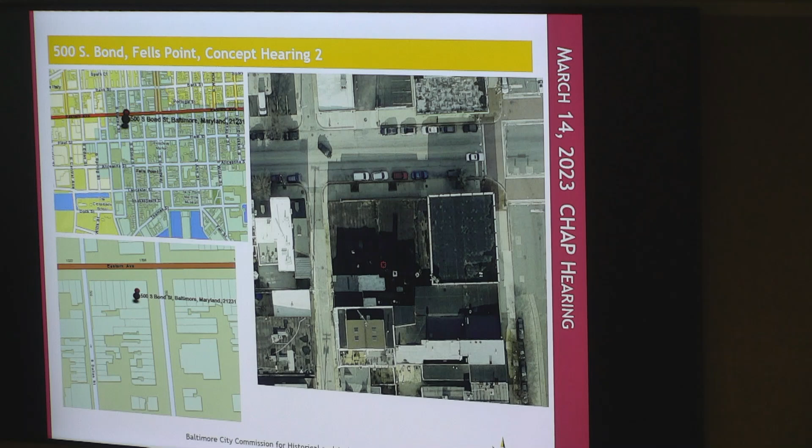Thank you, Mr. Chairman, Commissioners, ladies and gentlemen. We have for you today the continuation of the review to construct a one-story addition at 500 South Bond Street in Fells Point. Justin Seto, architect, applicant Chasen Development. The site, as noted before, is located in the western edge of the Fells Point Historic District. This area has been previously reviewed for the adjacent property at 1517 Eastern Avenue.

The structure is this one with the Chasen Company's name on the side of the building. It is a contemporary warehouse building located at the intersection of Eastern and South Bond Street, and also includes two row houses on the south side that had lost their original historic facades at some point before the creation of the historic district in 2007.

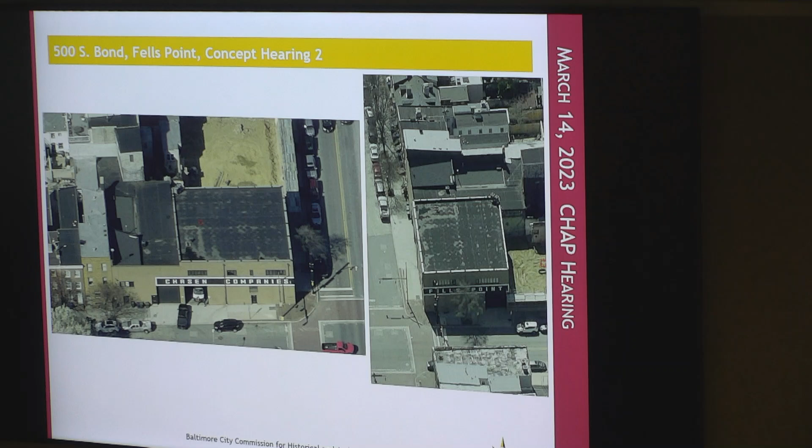The plans are to construct a one-story addition on top of this existing building, and convert the interior top floor area of the warehouse into residential units. The site map here shows the exact footprint of the property, and we see a view looking north towards Eastern Avenue at the top.

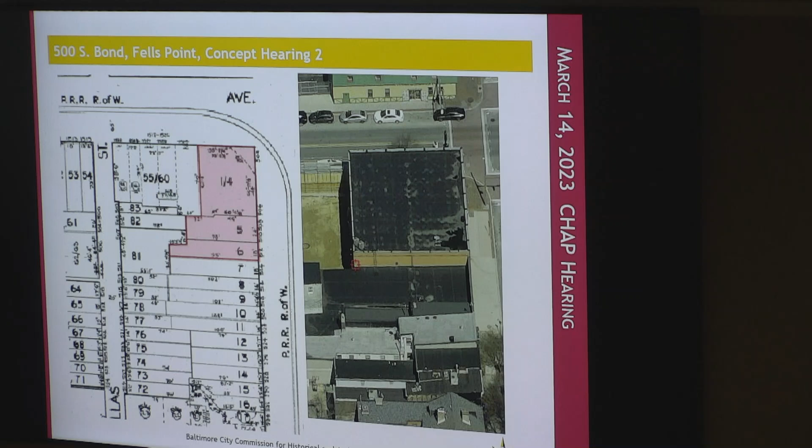The property was reviewed for signage by CHAP staff, and has been approved for height, massing, and scale of the proposed addition on November 13th, 2022, and is returning for review of final details. The applicant proposes to construct a one-story residential addition on a two-story non-contributing warehouse building.

The proposed addition will be comprised of a band of multi-light aluminum-clad windows on both the north and east elevations. The new floor will not be set back on both the Eastern Avenue and South Bond Street elevations. The building will have a flat roof. There will be an elevator and stair towers that rise an additional story, but they're located at the southern portion of the building and set back from the South Bond Street elevation, so these will not be visible.

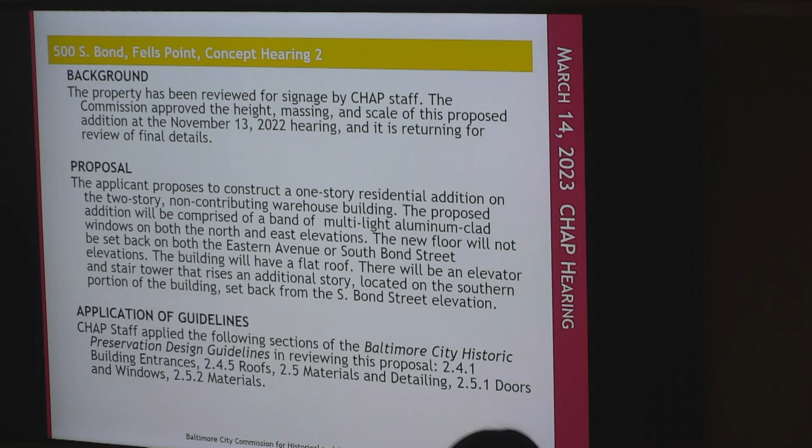CHAP applied the following guidelines: 2.4.1 building entrances, 2.4.5 roofs, 2.5 materials and detailing, 2.5.1 doors and windows, 2.5.2 materials.

Under 2.4.1, building entrances, the new residential entrance will be located close to the adjacent residential properties along South Bond Street. Under 2.4.5, roofs, the building will have a simple flat roof, covered in a rubber membrane system. All the rooftop features will be set back and not visible from the public right-of-way. The addition will have a simple, well-proportioned cornice edge with minimal detailing.

The current design is showing a broken-up cornice design at the moment. There will be a small rear deck on the southwest corner of the roof.

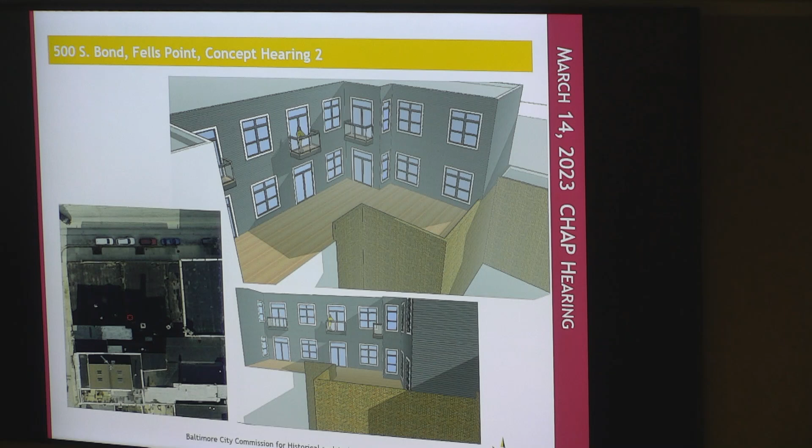Staff recommendation is for approval of the addition with final details to return to staff. Thank you.

Eddie, thank you. Commissioners, do you have any questions for Eddie? Yes, just questions, right, not deliberation. Yeah, that's right. I have questions, but maybe, I don't know if you're going to steer them to the architect.

One question: the use of the first floor warehouse is going to stay, that's not changing, is that correct? Correct. And the other question I had... what was the other question I had?

On the rendering, it looked like it showed a site improvement in the right of way, and I'm curious about that. If you look at the photo right now, in the corner, the ADA accessible ramp kind of runs into the corner of the building, but it shows there's improvements on the site corner. Is there any intention to do site improvements in the right of way on that corner?

That you'll have to ask the development team. I do believe they plan to try to improve it, but we haven't talked specifically about that in this phase. Those are all my questions for now, and I'll wait for deliberation. Any other commissioners? Any questions for Eddie?

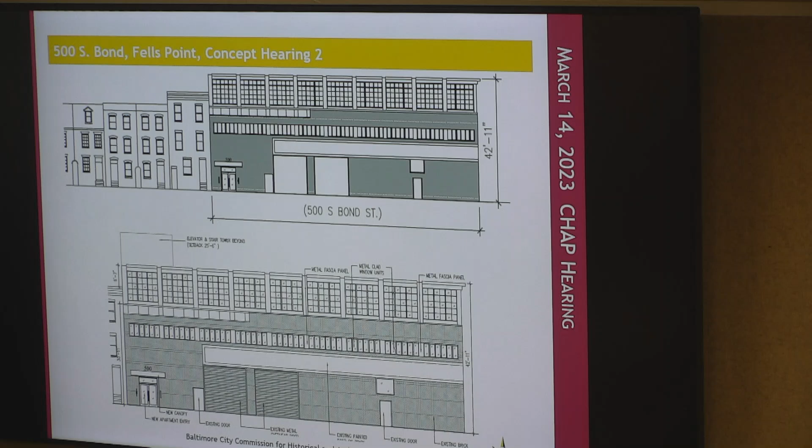I would also consider—it looks like you're continuing to cut the rest of that off in order to continue that, or vice versa. It could be that you're filling that in. I would think that if you go back to the rendering, maybe on the eastern side, with—there you go.

If you look at how that cuts down and jogs at the cornice of the new construction, I don't think it's something that would make or break it, but if you're showing this in conjunction, why not have the cornice match up across and really turn the corner? There's a way to adjust the detail so your glass fenestration goes up higher, but the cornice line would still match the cornering of the building. So it's just a small recommendation.

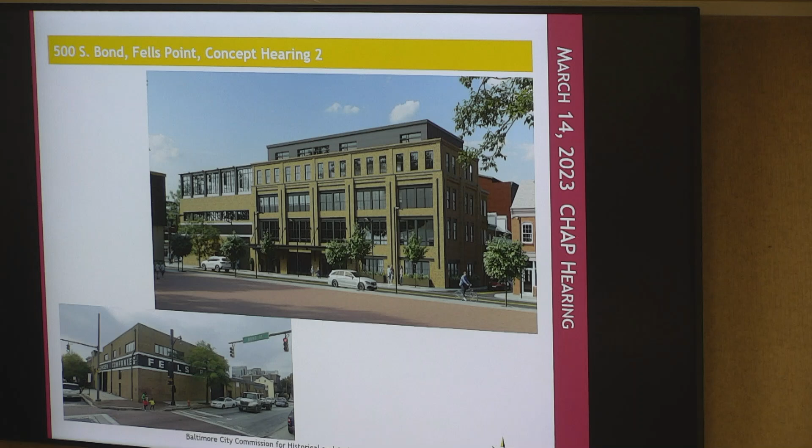The other thing I want to be mindful of: it looks like the second floor of your units is part of a strip window system across the second floor. Is that right? I'm only concerned about the scale. I'm assuming you'll deal with this in your permit drawings, but it doesn't look like it's per code for egress for an emergency window, so just be mindful of that. Looking at the elevation, if that second floor is part of the strip window system for the new units, those windows seem very narrow across the board. If they're operable, which one is operable? Again, it's neither here nor there for us, I just noticed it and didn't know if that was an issue for egress.

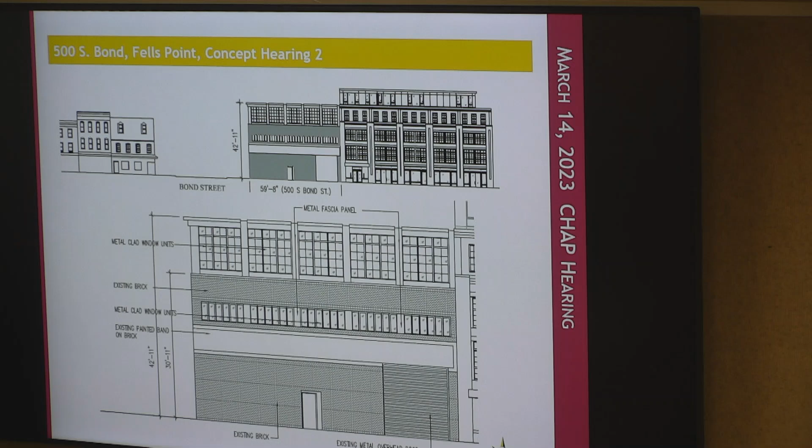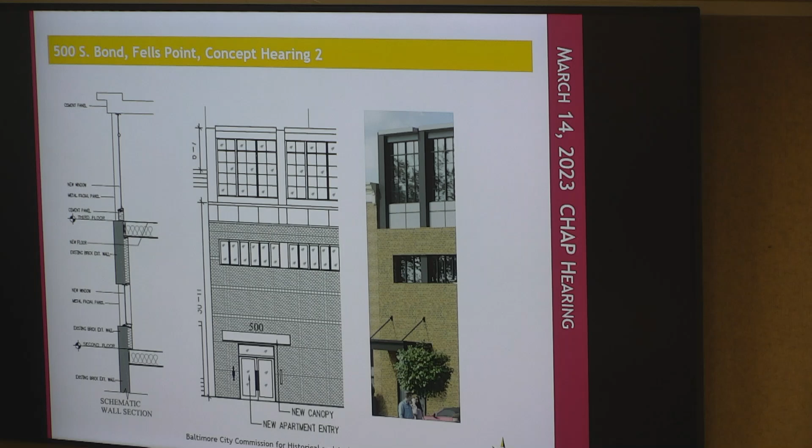The last comment I have, maybe it addresses the neighboring properties' concern a little bit. The only thing I'm missing with this project is the corner of the building - looking at the rendering, I know the warehouse use isn't changing and you're not incorporating commercial retail, but that corner seems like a missed opportunity. We have a corner that's really solid, and you'd wish maybe the lobby should have been there, where that corner can be engaged - opened up with more fenestration, more activity. The main lobby could be there instead of being right next to the neighboring residential property.

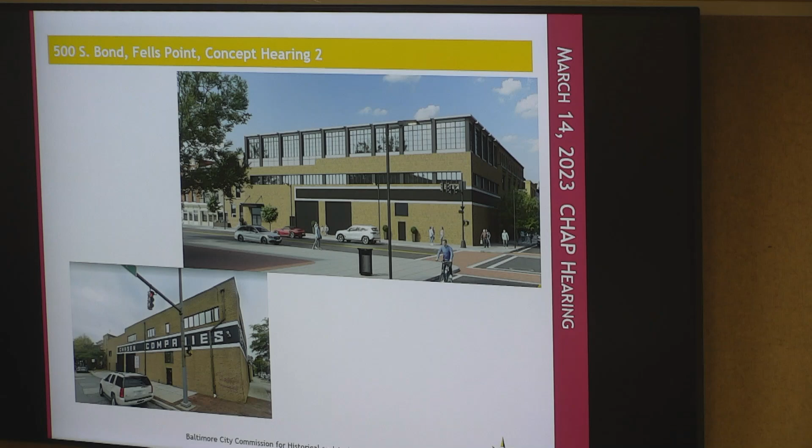But the ship has probably sailed. My recommendation is that the owner and architect would consider that corner more, since you're going that far anyway to enliven it. That goes with the site improvements too - you're going to have a new ADA ramp corresponding to the crosswalk, and probably new sidewalk all the way around. But we still have that solid corner, and I wish that would be addressed. These are more urban design motions, probably, as opposed to architectural or historical design motion, but I just wish that solid wall in the corner was addressed. So that's my comments.

Okay, Bob, thank you. Is there anyone else?

Go right ahead, Ann. Well, that's what I don't understand - the ground floor plan doesn't correlate to the renderings at all. Is there a plan I'm not getting? Like page 12 of the PDF? Everything we were given is in that packet on the Wix site. So to your point, the corner in this plan - the lobby? No, it's on the turn. Eastern is the top of this, and Bond is the right. Oh, because there's no north arrow here. Yeah, that's why - go north. Thank you, so glad I can read a plan.

Anyone else would like to share?

Go ahead, Catherine. I too agree that the updated rendering in response to the ARC comments has improvements over what is shown. I have a couple comments, but as a procedural question, since these weren't submitted previously - do review comments we propose need to reflect the rendering shown on screen in that application, or can we base them on the updated rendering provided by the applicant?

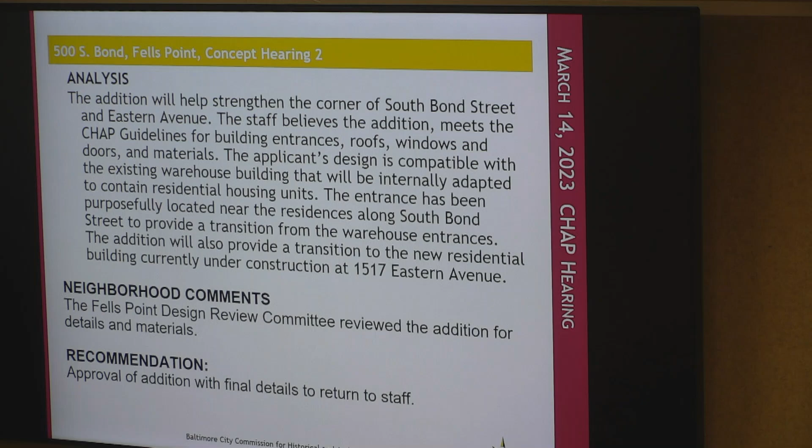Commissioners, the recommendation is approval of addition with final details to return to staff for 500 South Bond, Fells Point. Do I have a motion for the recommendation? I was going to say, to make sure Eric is good with writing down the motion, I guess my question for fellow commissioners is this.

If we agree with staff recommendation, are we agreeing based on the updated rendering or the prior one submitted? I think it's the updated, right? That's the latest. That's what I'm asking. Yeah, why don't we just approve the FDRC. Yes, you guys are quiet, yes, okay, all right.

If everyone's comfortable, then I'll go ahead and make a motion. Okay, so I move to concur with staff's recommendation for the approval of addition with final details to return to staff, based on the updated rendering provided at the meeting today.

Do I have a second? Second. All in favor? Aye. Do I have opposed? The ayes have it. Thank you.

Next on our list, we have 517 South Wolfe Street, Fells Point Historic District. The request is concept review to construct a two-story addition on top of the existing garage on South Chapel Street. The applicant is Julie Tice, and the staff, once again, is Mr. Eddie Leon.

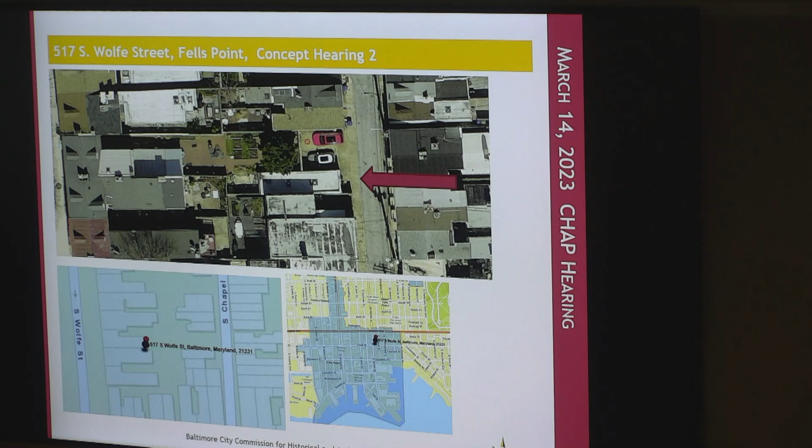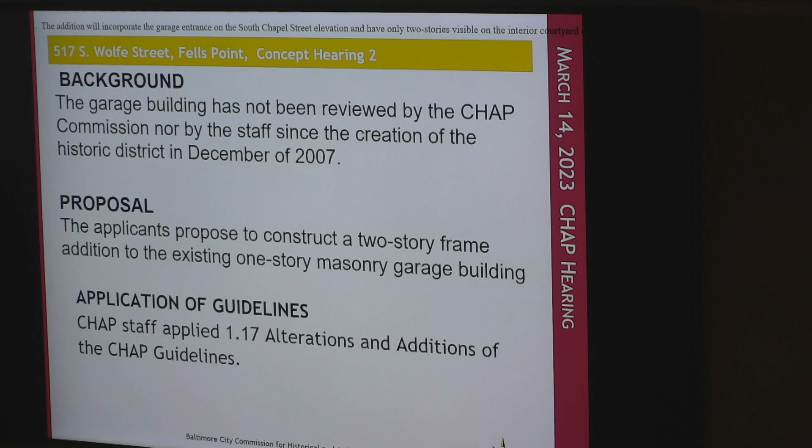The garage building has not been reviewed by the CHAP Commission, nor by the staff since the creation of the Historic District in December of 2007. The applicants propose to construct a two-story frame building addition on the existing one-story masonry garage building. Staff applied 1.17 alterations and additions of the CHAP guidelines.

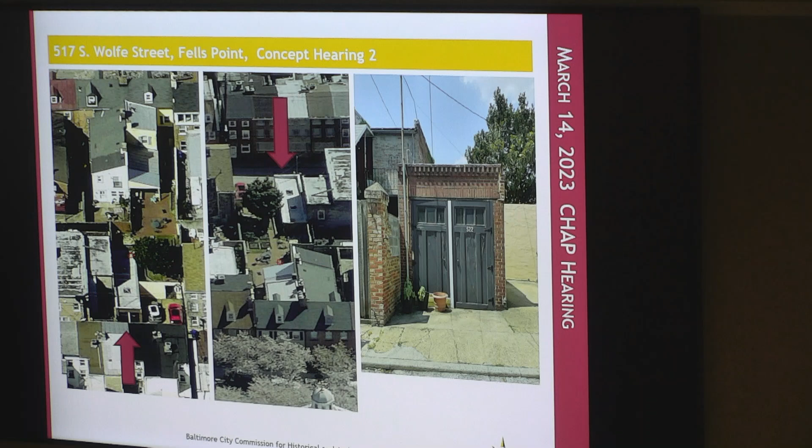The site on the far left photograph is looking west toward Chapel Street at the bottom and looking toward the back of 517 South Wolfe Street. The middle photograph shows it looking from Wolfe Street toward the east, and we see the top of the roof below the arrow. Then we have the actual two-door standing garage building that remains on the site facing South Chapel.

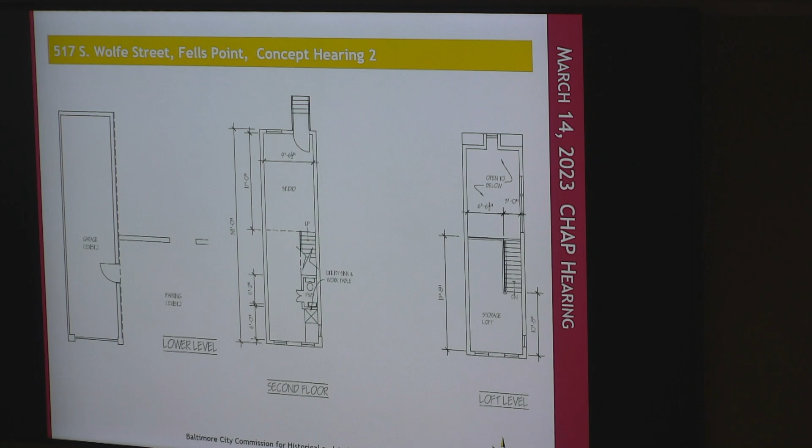The plans are to retain the garage structure on the ground floor and then build two additional floors above it. The proposal is almost like a dual design. The South Chapel Street elevation will add a facade of 2 stories directly influenced by the late Italianate style of row house architecture typically found throughout Fells Point. It does conform to the height, scale, and massing of other structures along South Chapel Street.

The reverse of the building, due to the topography of the site, only the 2 stories on the other side would be visible, facing into the courtyard. So we have a gabled roof with a dormer, single entrance and window, and small stairs that allow the owner to enter the building at what would be the 2nd story level of the building.

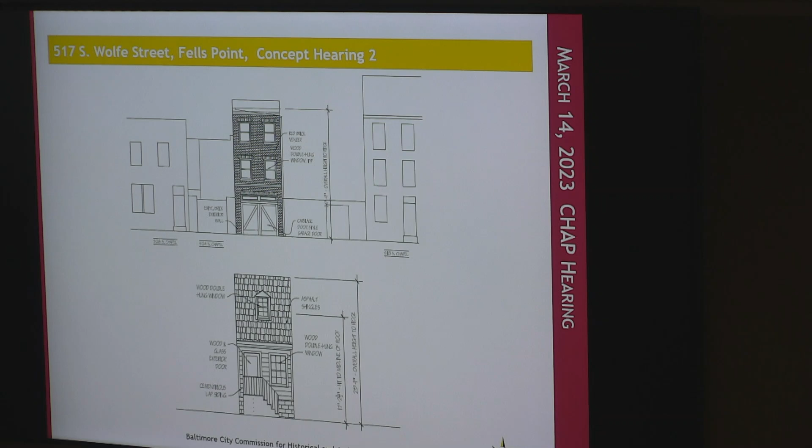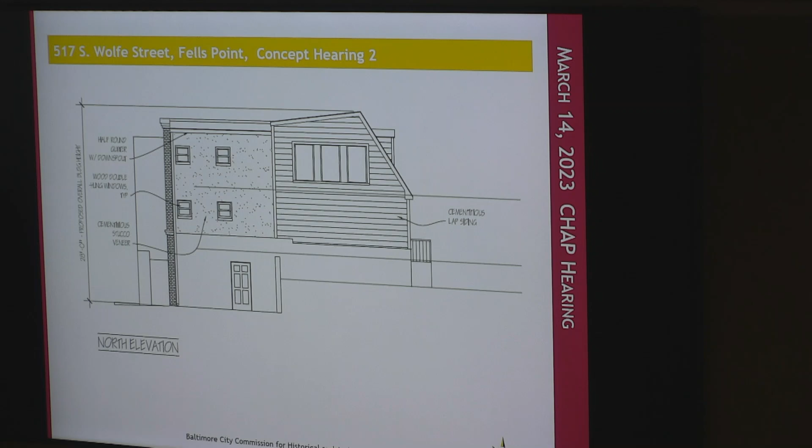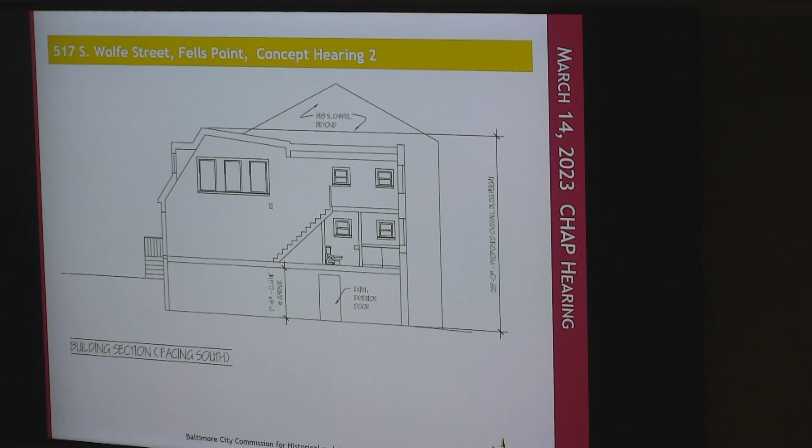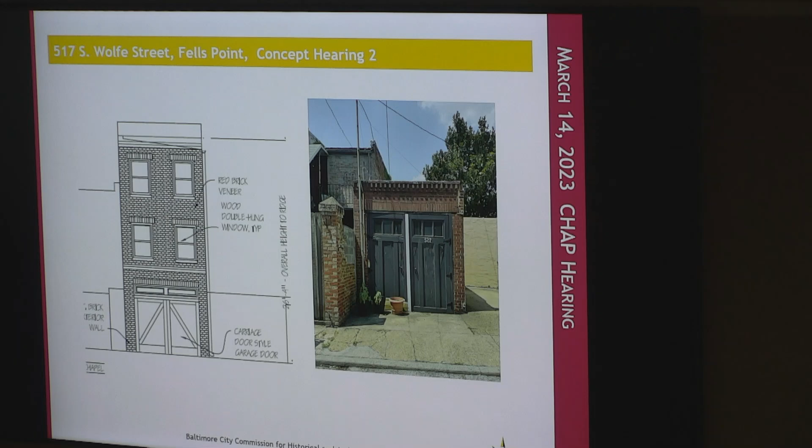Looking from the south side, we see again, looking through the building, a cut-through. We also see the windows on the other side that face over the parking area pad that exists. A close-up detail showing double hung windows on the second and third story, a very simple designed cornice, retaining the two garage doors and replacing them with proper carriage doors incorporated back into the design here.

Staff believes the addition meets the CHAP guidelines for height, scale, and massing. The combination of styles is unique and will not be confused for an original historic building, but reflects that it is a product of its time.

The building will be used as an artist studio for the owner. The building incorporates two different period styles found in the district. This blend of different styles can be found in many examples throughout the district that has evolved over 200 years, and therefore does not seem out of place.

The Community Association has had no objections, and the DRC did review the project previously when it had a slightly different design for the same concept of building 2 stories above it. Recommendation: staff recommends approval of height, massing, and scale, and recommends that the project return to staff for final review.

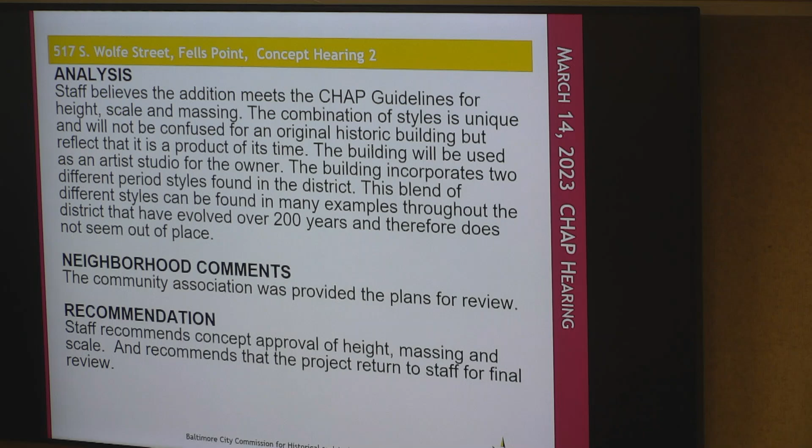For 517 South Wolfe Street in Fells Point, do I have anyone who'd like to put that motion forward? I move to approve height, massing, and scale, with the addition that the original door arrangement be researched and considered for the design of new doors, and that the project return to staff for final review.

Do I have a second? A second. All in favor? Any opposed? The ayes have it. Thank you.

Next on our agenda, 1100 East Baltimore Street, Jonestown Historic District. The request: demolition hearing, determination of architectural significance. The applicant is the Helping Up Mission, Inc., which is the contract purchaser, and our staff will be our own Eric Holcomb.

All right, unless Stacy and I are having a conversation of who should give the staff report. Whatever you two decide. Eric. All right, it'll be good to see you up there in front of the podium. Yeah, all right, Eric. And this is the... Great.

Good afternoon, Commission, nice seeing you from up here. We're here today to do a determination of historical significance of 1100 East Baltimore Street. Again, the petitioner is the Helping Up Mission, that's the contract purchaser.

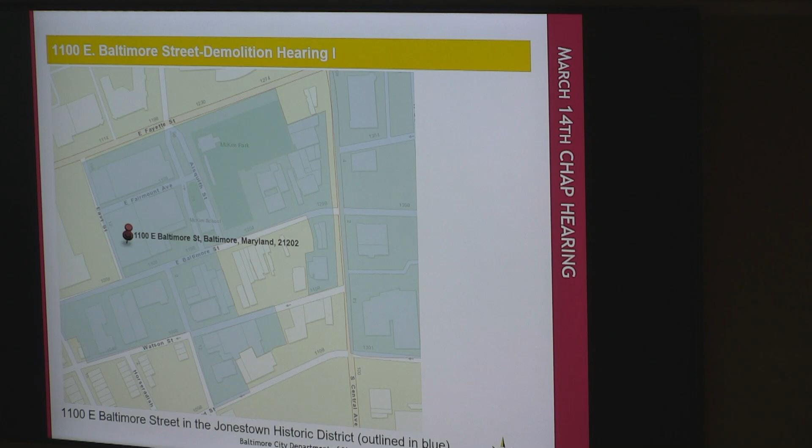So taking a quick look here, the blue is the local historic district of Jonestown, and then you see 1100 East Baltimore Street pinned right there. Directly west of it is a two-story garage. Directly on the south side is more of your historic Jonestown fabric.

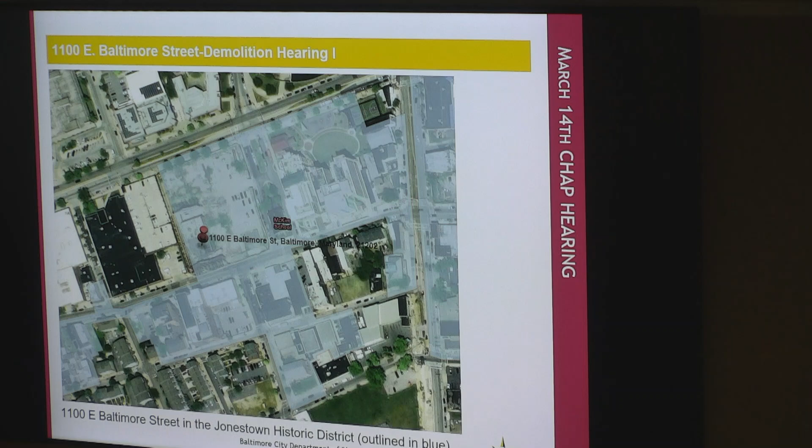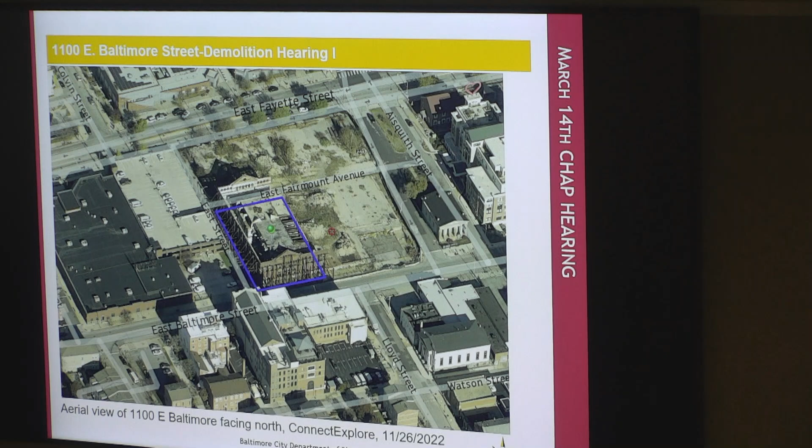All right, so first let's look at this. This was the entire block of the original development proposal that was given to CHAP back in 2012. Through several different CHAP hearings, we approved the demolition of everything except for three elevations: the south, west, and north elevation of the historic Hendler building, the Creamery building.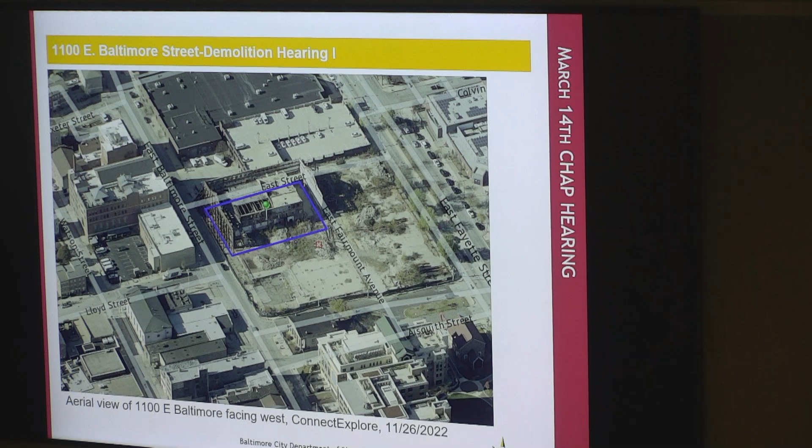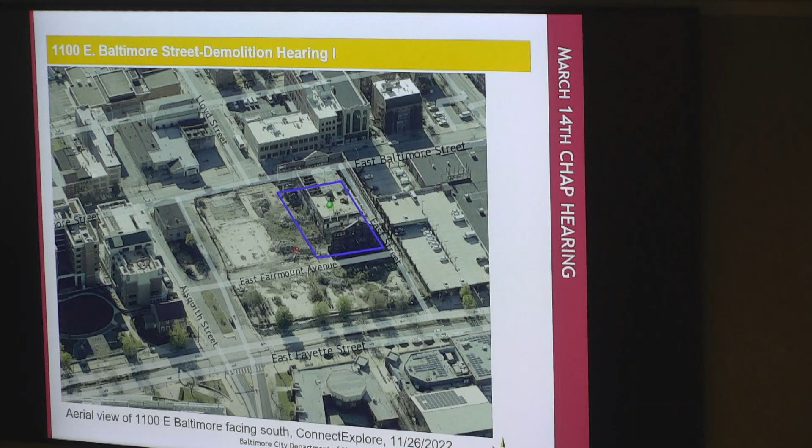This is what we're seeing right here, these three elevations. This still has its interior on there, and that's why you don't see the shoring on the outside. Through the approval process and the development efforts of this block, we approved a lot of non-historic demolition and some historic demolition.

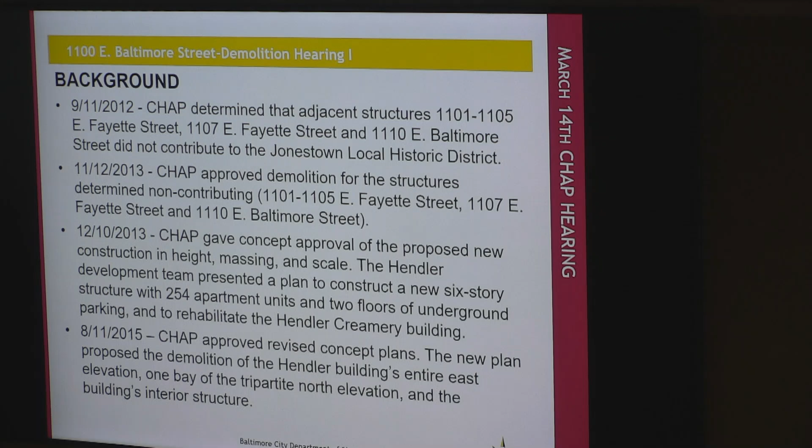It was a block-size development. In 2015, we approved revised concepts; a new plan proposed the demolition of the Hendler Building's entire east elevation, one bay of the north elevation, and the entire interior. So that's how we got to what we have now.

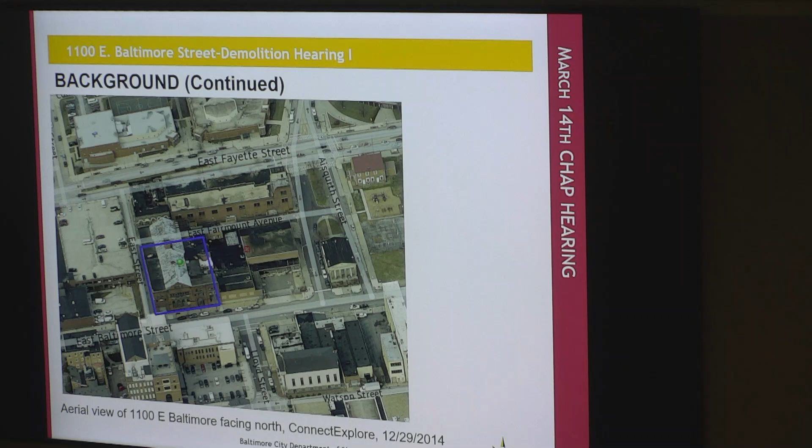Looking at the background again, that's what we sort of see before demolition. In 2017, we did some more amendments, and in 2018 DHCD approved the demolition permit and a shoring plan for the facades. On November 20th, 2021, a building inspector went out to investigate whether it was an emergency condition, and determined it was not an emergency at that time.

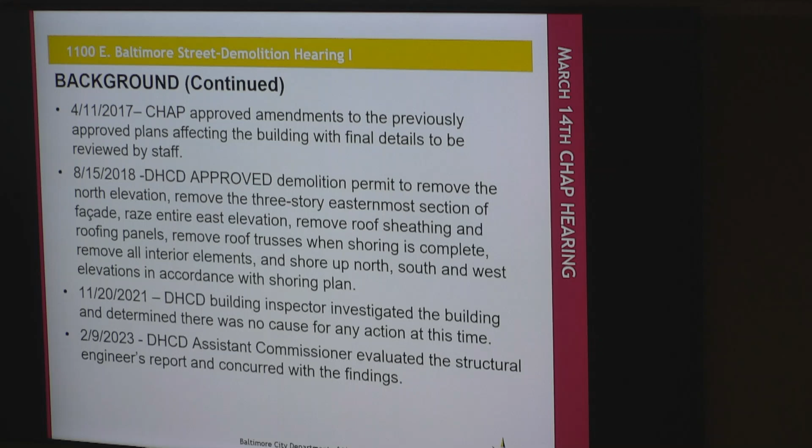But on February 9th, 2023, the Assistant Commissioner evaluated the structural engineer's report and concurred with its findings, so we had a double-check on that. Just looking at the background again, here we go. This is what we approved.

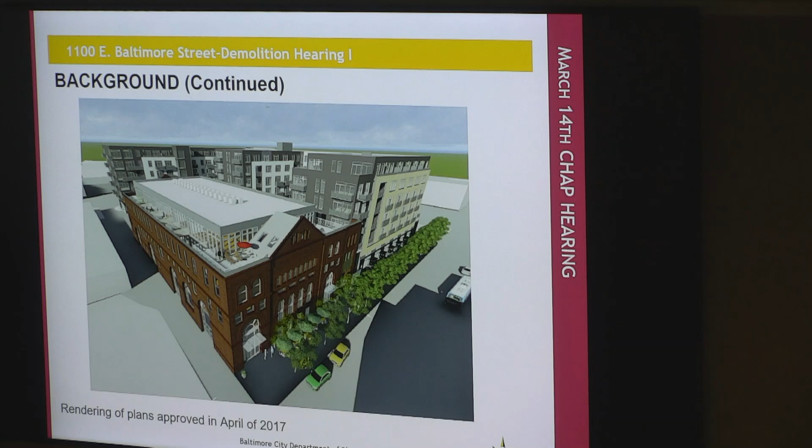This was one of the final renderings of what it was supposed to look like. But that did not happen. It was a great effort to develop the property, but it didn't happen, so now we're left with the proposal to demolish the remaining 3 elevations.

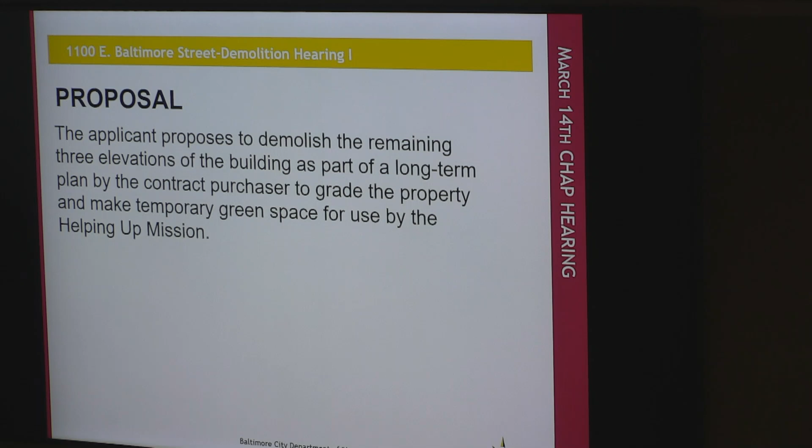As part of a long-term plan, they'll grade the property and make it temporary green space, and then in probably 5 or more years develop that site for their purposes. So basically, we would have a green space for about 5 years.

Application of design guidelines, looking at this demolition hearing. These are the guidelines that we use to consider what is historic and what is not historic.

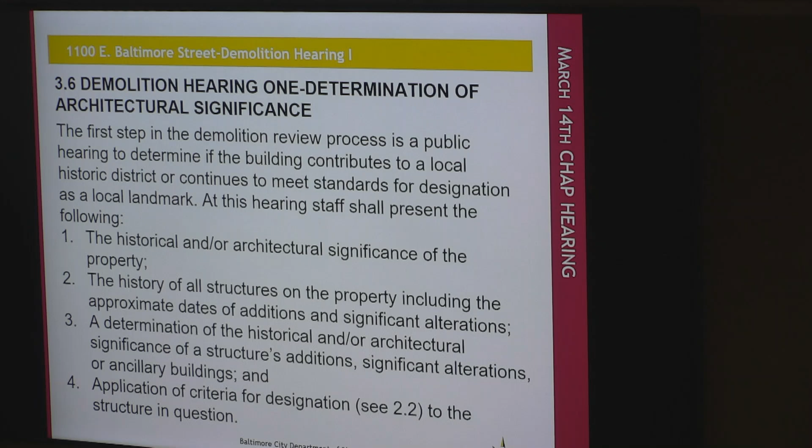Historic architectural significance of the property: all structures, dates, the determination of the historic and architectural significance of a structure's additions, significant alterations, or ancillary buildings. So when we do a determination of architectural significance, we look at these right here. What we're looking at basically is the 3 elevations of this property. That's the only thing that's left of this.

Determination regarding the historic significance of the structure would be prior to considering the details of the demolition. We really don't have any details. We will not be looking at new construction drawings anytime soon.

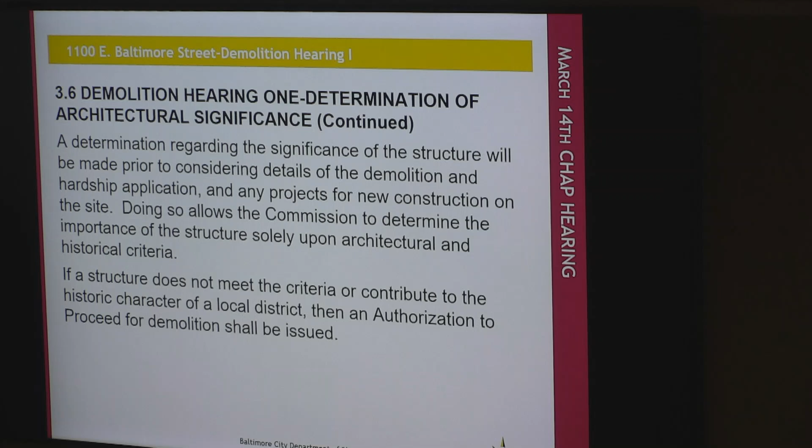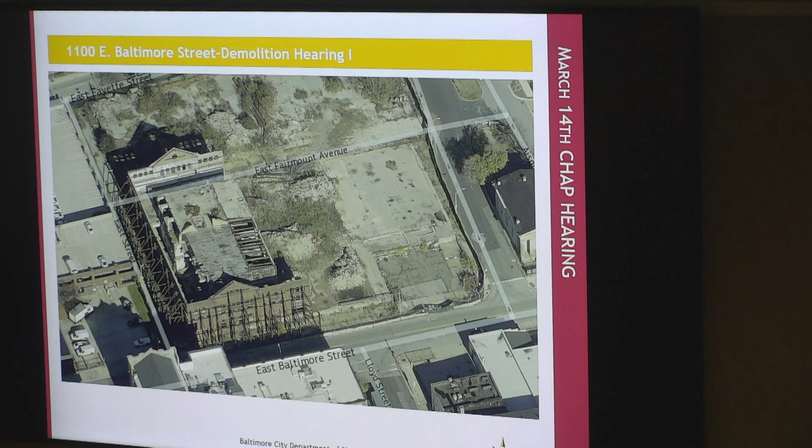And then looking at what we have today is pretty much just the 3 buildings. Now, want to make sure that we look at the criteria for evaluation. And this is what we will apply to see if it still retains its historic significance or not. And we'll walk you through that logic to get there.

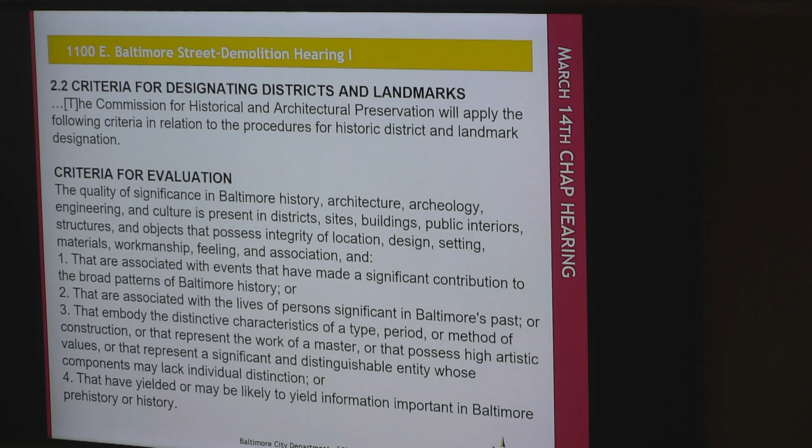But before we do that, we want to do an analysis. And that analysis is going to look at the structural engineer's report and see how much of the building that we see today will remain if this building would be restored and rehabilitated, or the facades being stabilized and incorporated into a new development. So that's what we really want to know, is how much of those 3 elevations can we save?

And looking at some of the things, the structural engineer's report really pointed out lots of different things, and then we'll have a list of the deterioration on here, and then the conclusions that we looked at. But if you're looking at these things, we'll just go back here.

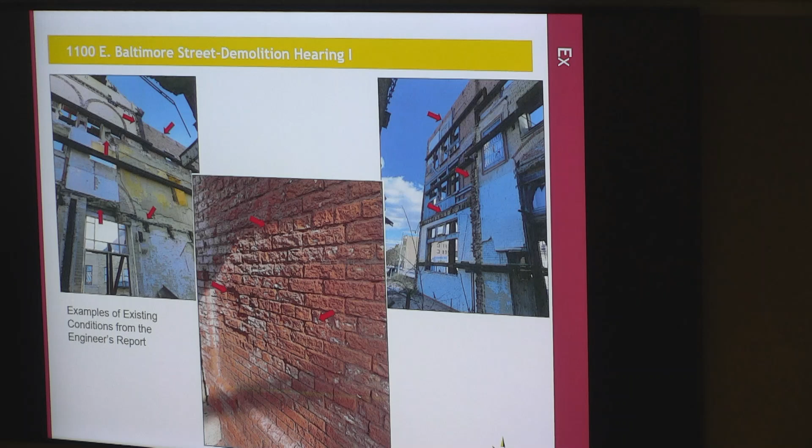Lots of sandblasted brick that has spent years and years deteriorating and is sort of chalking and falling apart. We have on the inside, there are steel lintels and steel I-beams that were left in the building during the 2018 demolition. Those steels are causing problems to the building right now. And if these facades were to be incorporated into another development, they would have to be removed. That's something we'll talk about a little bit later.

And some other problems, we see spalling of the brick. Even seeing some of the wythes of the brick sort of separating from the areas. There's no cap on the top of the building right here. So this is really sort of lists what we saw there.

The interior surface of the wall, well this is the analysis piece of it. From the conclusions of the engineer's report, we know that the interior surface of the wall would have to be completely removed and replaced if the walls were to remain. Now, is that 90% or 100% or 85%? We could discuss that, but the vast majority of the interior surface would have to be removed and replaced.

The deteriorated exterior side of the facades can't be repaired independently of the interior side. So if you're working on the exterior, replacing portions of the exterior wall and portions of the interior wall, you're going to have a direct impact on either the interior or exterior, and most likely both sides of that wall will have to be removed.

That wall, I think when you get to the bottom, when we asked the engineers, is probably 7 bricks thick, and when you get to the top, it's about 2 bricks thick. So there is that difference right there. But that's something to really think about. There's a direct relationship between the interior and exterior. It is impossible to replace the interior wythes of the walls while leaving the exterior intact.

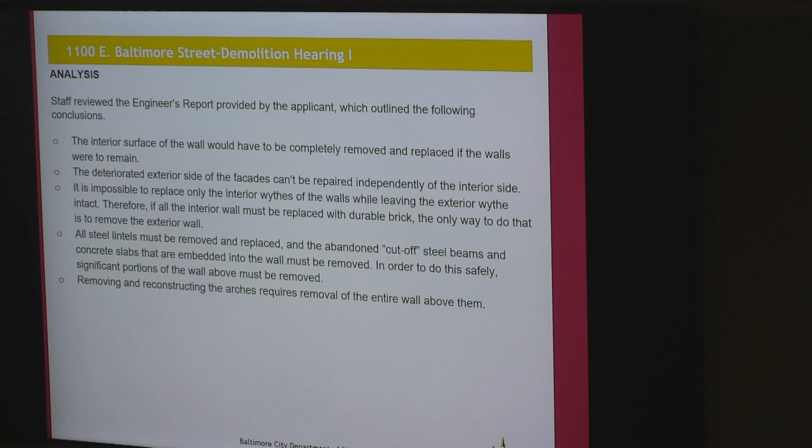So basically, if you're really thinking about it, not only do we have to remove the structurally unsound and extremely deteriorated brick and replace it with new brick, but when we remove portions of the building we have to make it structurally sound. There are portions above it we have to remove, because you can't do it safely. Gravity will pretty much say the bricks above will fall if you remove the bricks at the bottom. There's ways to do it, but that's sort of a given.

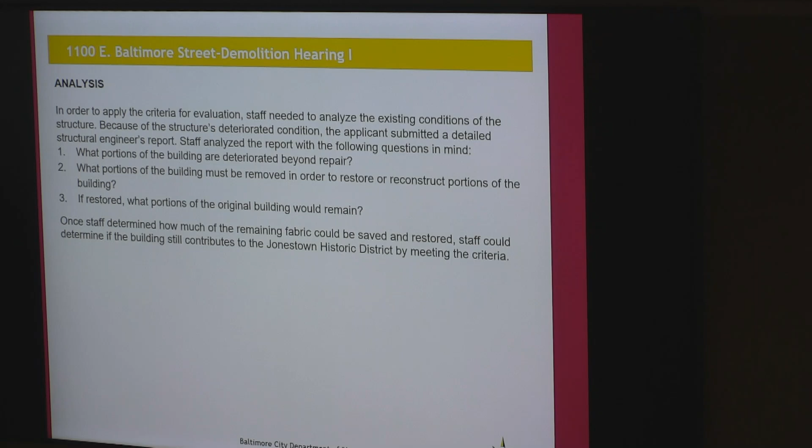And just looking at some more here. And am I going the right way? I'm going the wrong way. Sorry. It's a lot harder than I remember it to be.

So at the end of the day, and we could have a discussion on this, we do believe that the existing structure is deteriorated beyond repair, and therefore it has lost its historical significance. It cannot convey the four criteria that we use to determine historical significance, and no longer meets the criteria for eligibility as a contributing structure for the Jonestown district.

And I think that's it. But I think one of the things that would be really useful, first of all, if there are any questions, hopefully the structural engineer can come by and talk to and answer your questions about his report. He has several illustrations that could really help us visualize how much of that building, if we could restore it, would be original fabric.

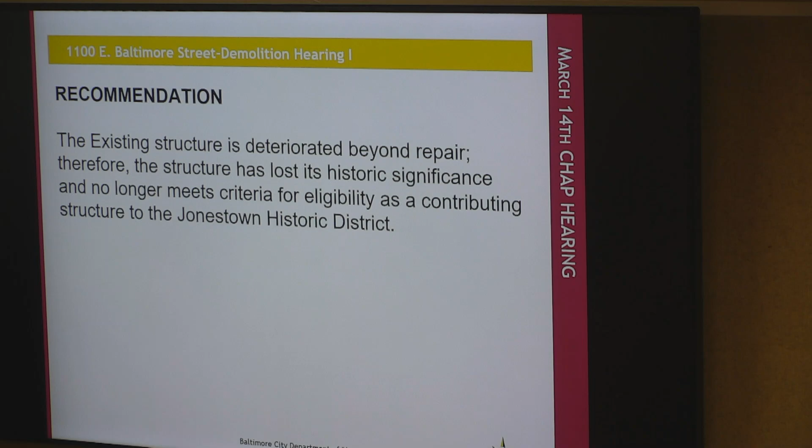If there is no more discussion, for 1100 East Baltimore Street, the recommendation is the existing structure is deteriorated beyond repair. Therefore, the structure has lost its historic significance and no longer meets criteria for eligibility as a contributing structure to the Jonestown Historic District. But we also have, Eric, the piece about the commemoration.

How do we want to put that inside the recommendation? So again, I'd like to move the staff recommendation, but with the caveat that there be a historic marker. Do I have anyone who would like to put that motion forward? That's what we just did. Thank you, sir. Do I have a second? There we go. All in favor?

Aye. Do I have any opposed? Nay. We have to go around? Yes, we're gonna have to go. Of course we can go around. I'm gonna call it out here because I haven't got y'all's names listed.

Nicole Battle, approve the demolition. Councilman Bullock, yes. Chairman Good, yes. Chairman Langmead, no, but because I think it should go appropriately to a second demolition hearing or be handled by the city's emergency unsafe building inspection method. Commissioner Leon, yes, regretfully, yes.

Commissioner Mandaleev. Sorry, can I ask a question? No, we can't take questions now. I know it's hard. Okay, I heard like no would go to a second hearing. That was just for the benefit of everyone in the room understanding. You don't have to give a comment, you can just say yes or no.